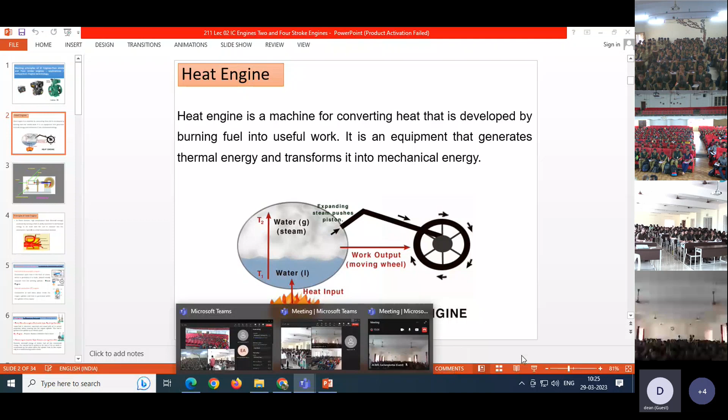For instance, if you are considering an engine, suppose for example if we are using two-wheeler, four-wheeler and tractors, those kinds of vehicles, the thermal power is converted into mechanical work.

So initially we are supplying the fuel inside the engine. The fuel is burned with the help of ignition. Then that will be converted into thermal energy. Again, the thermal energy is converted into mechanical work. So thereby we are doing different kinds of activities in agriculture.

A heat engine is a machine that converts chemical energy into thermal energy, and the thermal energy into mechanical energy. For doing this operation, there are different components involved in the engine, such as cylinder, piston, connecting rod, crankshaft, and camshaft. We will see each individual component later.

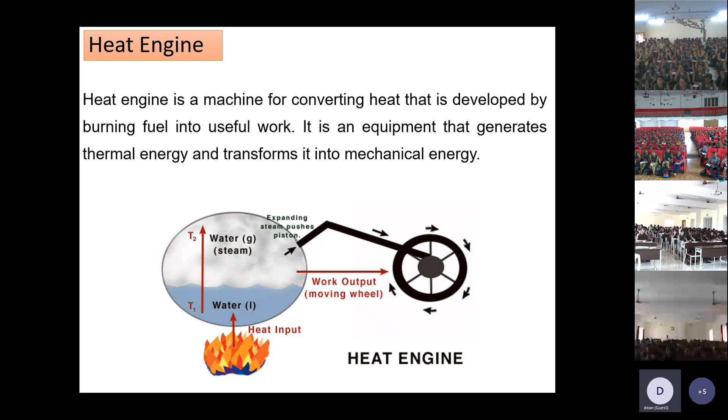So heat engine is a machine for converting heat developed by the burning of fuel into useful work. In this figure, there is burning gas below the component, so the water is converted into steam. The steam has more energy compared to water, so it pushes the piston towards the flywheel or crankshaft, and thereby we get mechanical work. So fuel energy is converted into chemical energy, chemical energy into thermal energy, and thermal energy into mechanical work. This is the basic principle of the heat engine.

This is an example of an external combustion engine, where the ignition and burning happens outside of the cylinder. Inside there will be steam or air. When the air or steam gets energy, it tries to expand. According to the gas law, when you burn some air or gas, it will expand, and this expansion pushes the piston, thereby giving us rotational movement. So the linear movement is converted into rotational movement, and thereby we achieve all kinds of activity.

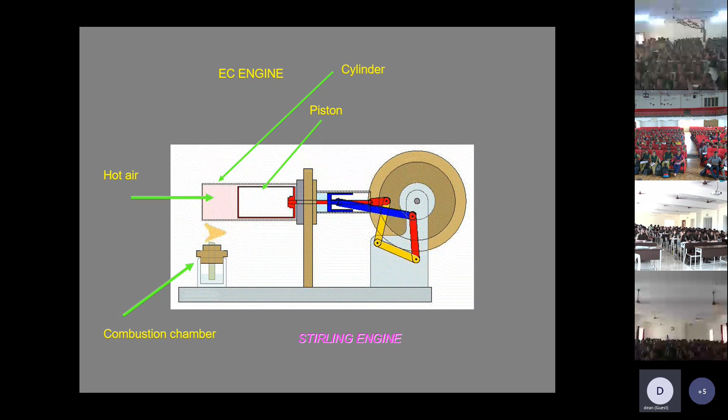The power moves towards the gearbox, then towards the differential, and finally reaches the drive wheel. The wheel makes the rotational effect, and thereby we pull some kind of load or transport goods somewhere. So thereby we are getting power.

Considering thermal energy, not all of it is converted into useful work. Some heat is lost due to friction, loss due to exhaust gas, some due to radiation, and some thermal energy moves away by conduction. So different components separate out from the main thermal energy.

In this device, the high temperature heat produced by the burning of fuel is partially converted to mechanical energy to do work, and the rest is rejected into the atmosphere in terms of smoke. Whenever the engine is working anywhere, we can witness some kind of smoke along with heat, so we are wasting some heat energy. There is no 100% conversion of heat energy into mechanical work.

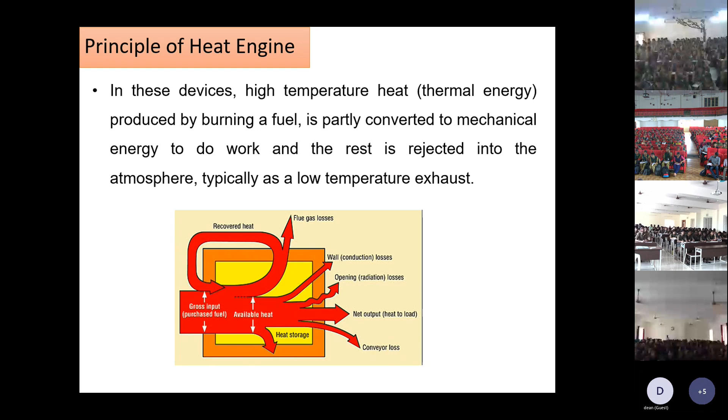Now let's look at different types of engines according to the operation, the usage of fuel, and the stroke, so that we can classify different kinds of engines. First, based on combustion of fuel, that is, where the fuel is burned, whether inside the cylinder or outside the cylinder. We can classify this as external combustion engine or internal combustion engine.

The best example of an external combustion engine is the steam engine. There we burn the gas outside of the cylinder, then the gas is expanded or converted into steam, and thereby we achieve mechanical work. The engine uses heat in the form of steam, which is generated in a boiler placed entirely separate from the working cylinder, and that is converted into mechanical work. The best example of the external combustion engine is the steam engine.

Next is the internal combustion engine, usually called IC engine. So IC engine is nothing but internal combustion engine, where the fuel is burned inside the cylinder. For example, as I already told, two-wheelers and four-wheelers — all kinds of these engines come under the internal combustion engine.

We already saw that fuel is filled in the tank, which moves into the cylinder, and that is converted into mechanical energy, giving power to our wheel. Then we move somewhere according to the usage of fuel inside the cylinder, accelerating our vehicle. So the internal combustion engine is one where fuel burns inside the cylinder — that's all. The combustion of fuel takes place inside the engine cylinder, and heat is generated within the cylinder of the engine. This is the example of the internal combustion engine.

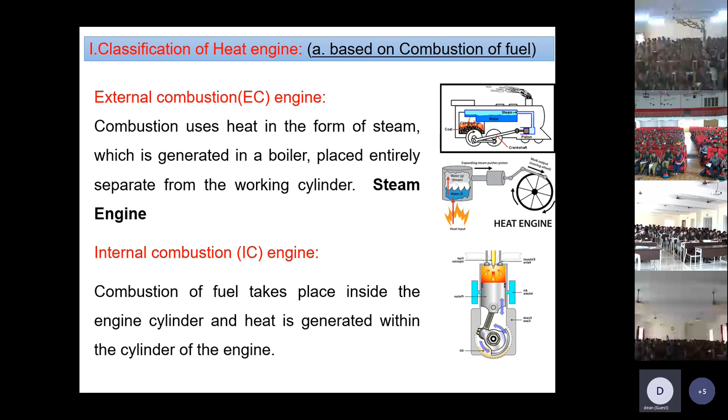Then according to the usage of fuel, we need energy from the fuel. As you know, fuel will be of different types: petrol, kerosene, diesel, even LPG, propane, butane, methane gases, which are also used as fuel for generating energy. If you consider petrol and gasoline engines, they come under spark ignition.

Later on I will tell why we are terming spark ignition engine. The petrol comes under one separate type of engine and a diesel engine comes under a different type. The petrol or gasoline engine comes under spark ignition engine. With the help of spark ignition, the ignition takes place and the pre-admitted mixture is inside the cylinder. So with the help of the ignition, the burning will happen. Again the same principle: we need to take thermal energy from the fuel, and that thermal energy is converted to mechanical energy.

So finally we are getting some mechanical work. Here liquid fuel is atomized. The petrol is in liquid form, and that should be atomized, meaning it should be vaporized. Then it should be mixed with the air. So the composition of the mixture of air and atomized petrol is not in liquid form, it will be in an atomized or vaporized form that is mixed with the air.

Both the mixture will enter into the cylinder with the help of the spark plug. The spark plug will produce the ignition. So with the help of the spark plug, the already present mixture of petrol and air will be ignited, and then burning will take place. So initially the mixture of petrol and air comes into the cylinder, and with the help of the spark plug, the ignition will be produced.

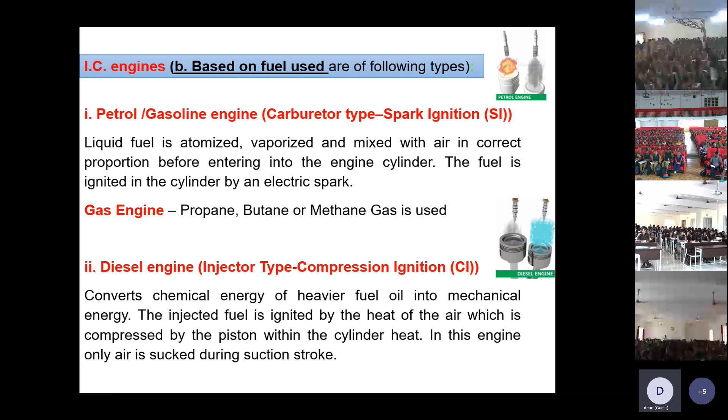I already told what is a spark ignition engine and what is a compression ignition engine. So here is the working principle of the spark ignition engine: a mixture of air and fuel, fuel meaning petrol. Suppose you are having a two-wheeler: initially the air and petrol are mixed with the help of a carburetor, and that is entered into the cylinder. Then with the help of the ignition spark plug, the ignition takes place, and the energy is converted into mechanical energy. So that is called the spark ignition engine or petrol engine.

The mixture of air and fuel is drawn into the engine cylinder, and the ignition is done by a spark plug. That's why we need a spark.

So if you are considering petrol engine, the important part is the spark plug. Every 100 hours or 200 hours, we need to clean the spark plug to provide proper ignition. The rapid explosion of air-fuel mixture within the cylinder, when ignited by the spark, is called constant volume combustion. This comes under the thermodynamics way of working principle.

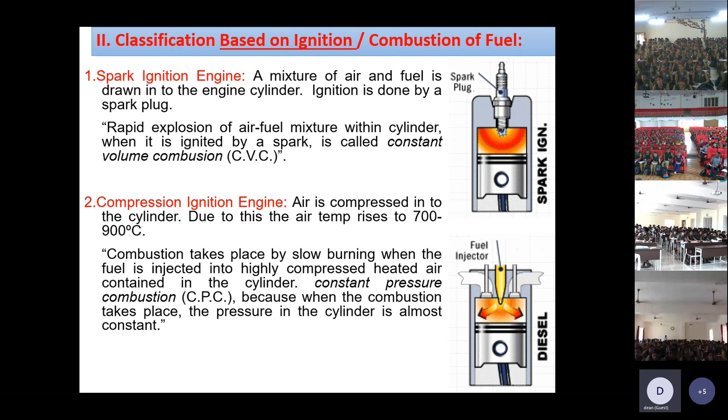Again, if you consider the compression ignition engine, air is compressed into the cylinder, and due to the compression, the air temperature rises to 700 to 900 degrees Celsius. Sorry for the interruption.

So actually petrol and diesel engines are very easy. If you consider the petrol engine, we have to say that it is a spark ignition engine. In the spark ignition engine, petrol and air mix and both enter into the cylinder, due to compression, and with the help of ignition, the fuel is burned. Then the expanded gas pushes the piston downward, thereby we get a rotational effect, which is then transmitted through the gearbox to the final wheel.

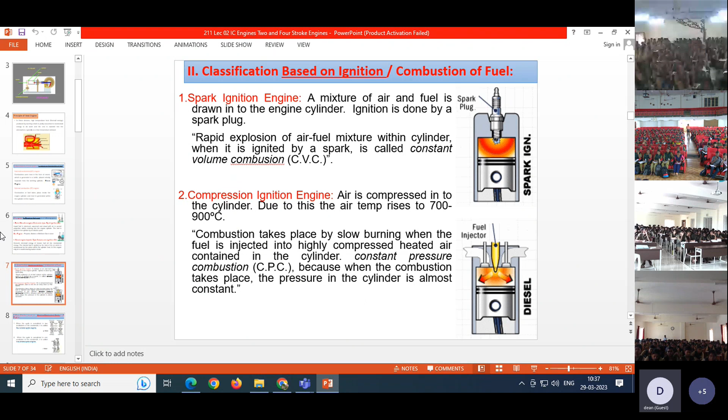But in the case of a diesel engine, initially air enters into the cylinder. Due to the high compression ratio, the pressure of air gets more heat content. Then at the end of the moment, we spray our diesel in a vaporized condition, and it burns. That's why we call the diesel engine a compression ignition engine, and the petrol engine a spark ignition engine. So there are only two differences: in a spark ignition engine, petrol and air enter the cylinder together initially, but in diesel, only air enters initially, and at the end of compression, we spray diesel into the cylinder with the help of an injector, which is like a nozzle.

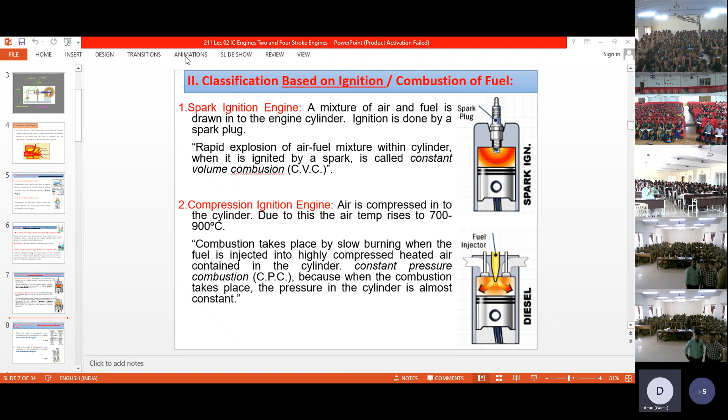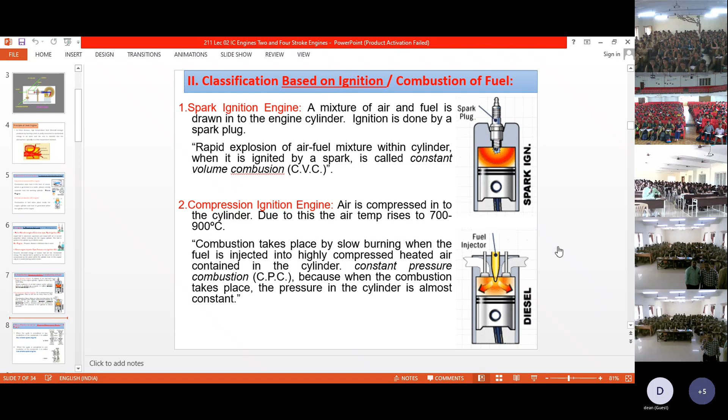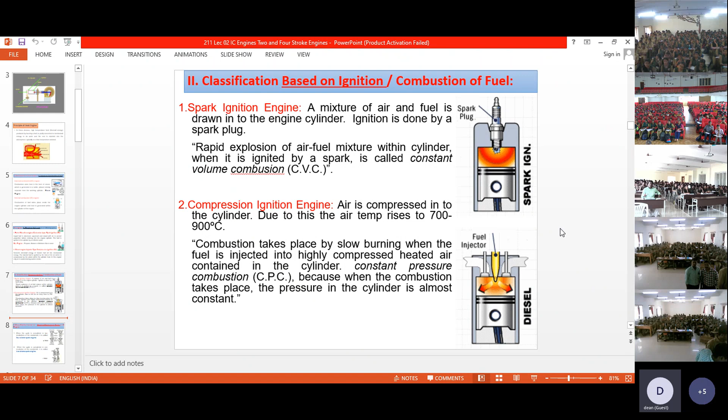Fuel combustion, that will be a spark ignition engine. Another one is a compression ignition engine. And according to the stroke, for making this thermal energy into mechanical energy, there will be different kinds of events occurring in the engine cylinder.

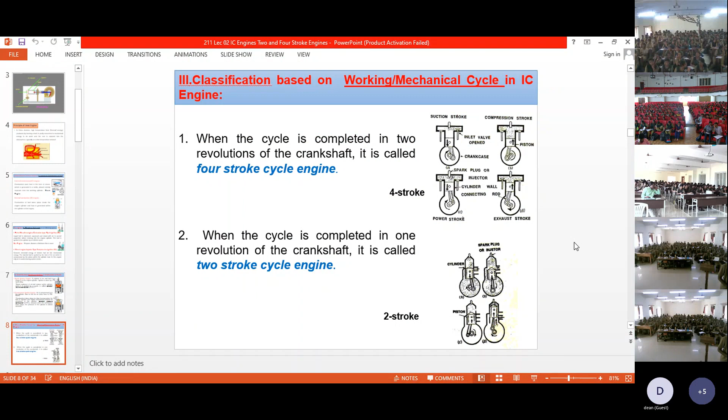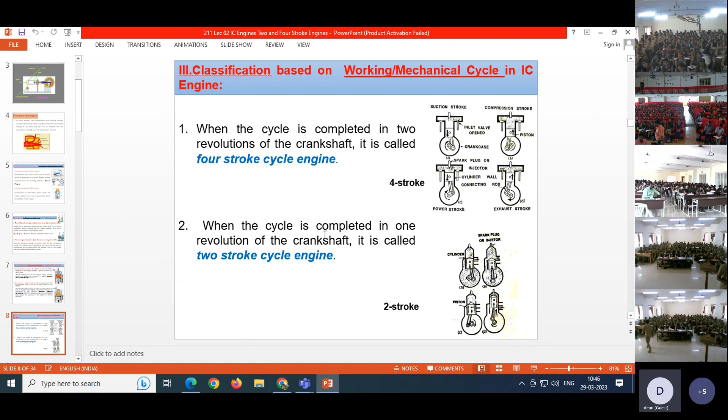So based on the stroke, there will be two types: one is the 4-stroke cycle engine, another is the 2-stroke cycle engine. The 4-stroke means nothing but the movement of the piston from top to bottom, that is called 1 stroke. If there are 4 strokes, the piston has to move 4 times: top to bottom, bottom to top, top to bottom, bottom to top. So in the 4-stroke, different kinds of events happen, thereby we get the output.

The cycle is completed in 2 revolutions of the crankshaft. I will explain how the crankshaft rotates based on the movement of the piston. When the stroke is 4-stroke, the crankshaft has to rotate 2 times, since 1 revolution is 360 degrees. Each 180 degrees, the piston moves from top to bottom, again bottom to top, so there's a 360 degree revolution covering 2 strokes. So obviously 4-stroke means 2 revolutions of the crankshaft is equivalent to 4 strokes.

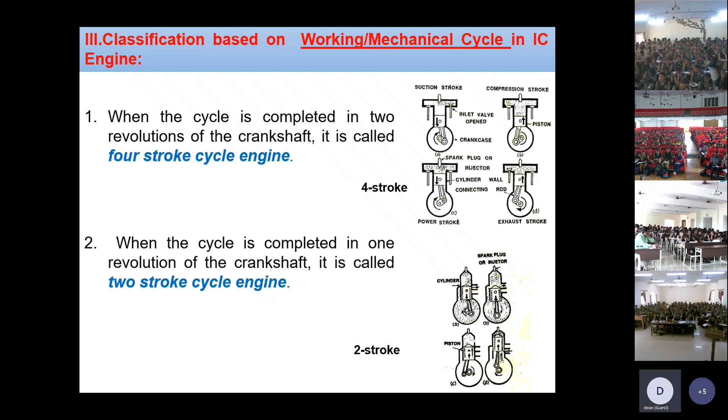But in the case of a 2-stroke engine, the 4 events occur within 2 strokes. So half of the crankshaft revolution completes 2 kinds of events: it may be suction, compression, power, then finally exhaust.

So the working principle of the internal combustion engine: as I told already, we need fuel inside the engine and we need ignition, thereby we burn our gas, which is converted into mechanical work. So these are all the essential components needed to run an engine.

So the mixture of fuel with the correct amount of air is exploded or burned in an engine cylinder which is closed at one end. The heat is released and causes the pressure of the burning gas to increase. These are all the steps involved in converting fuel into thermal energy, and the force acts on the closely fitting piston to move it down the cylinder.

The power is transmitted to the crankshaft by the connecting rod, and the crankshaft turns the flywheel. So this is how power moves from fuel to piston to connecting rod to crankshaft to flywheel. Then it goes to the gearbox, and finally it reaches the wheel.

So these are the steps involved when power generated from the fuel is moving towards the wheel. For continuous rotation of the crankshaft, the explosion is repeated at different time intervals. Before this can happen, the used gas has to be expelled. Whenever you feed a mixture of air and fuel, it should be burned, then the burned gas has to be removed from the cylinder. This is called removing smoke from the engine, or we can call it scavenging.

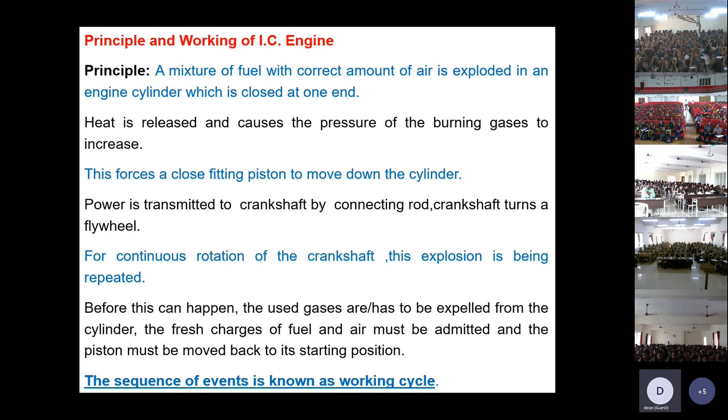In one working cycle, the fuel has to enter the cylinder, it has to be compressed, then burned, the burned gas has to expand, and the expanding gas transmits energy from fuel to cylinder. The transmitted movement is converted into rotary movement that reaches the wheel. These are all the events taking place during the working cycle of the engine.

If you consider a 4-stroke engine, from an exam point of view we are going to consider only two kinds of engines: one is a 4-stroke engine, the other is a 2-stroke engine. In both cases, the events happen at a predetermined time.

Almost all tractors currently use what is called the 4-stroke combustion cycle to convert diesel into motion. The 4-stroke approach is also known as the Otto cycle, invented by Nikolaus Otto. That's why we call it a diesel engine, or it is called the Otto cycle.

There are four kinds of strokes: one is suction stroke, another is compression stroke, third is power stroke, fourth is exhaust stroke. These are the strokes present in every 4-stroke engine as well as 2-stroke engine.

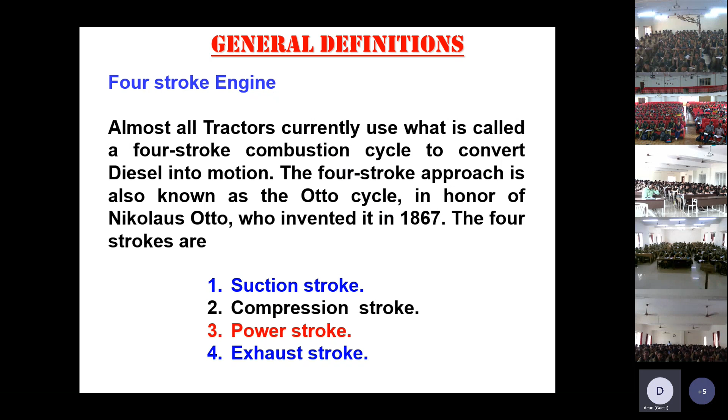Suction stroke is nothing but admitting the fuel mixture of air inside the cylinder, that is called suction. The suction stroke happens due to the movement of the piston from top to bottom, thereby creating low atmospheric pressure.

For example, if you have a syringe, when you draw the plunger from top to bottom, the liquid gets admitted inside the syringe. The same principle is involved in the cylinder. When the piston moves downward from top to bottom, it creates less atmospheric pressure, or negative atmospheric pressure. Due to this pressure difference, the fuel in the tank moves towards the cylinder.

Once air enters the cylinder, in case of a petrol engine we need to spray the petrol, so both air and petrol mixture enter during the suction stroke. But in case of a diesel engine, only air enters into the cylinder. During the end of compression, the diesel has to be sprayed. So the suction stroke is nothing but the entering of fuel inside the cylinder.

Again, considering suction, compression, power, and exhaust strokes, we need to consider the position of the valve. The valve is like a door. When you are sitting inside the classroom, you act as the fuel, entering the classroom through the door. The same way, the valve acts as a door—it opens at a particular time, and only then can the fuel enter from outside to inside.

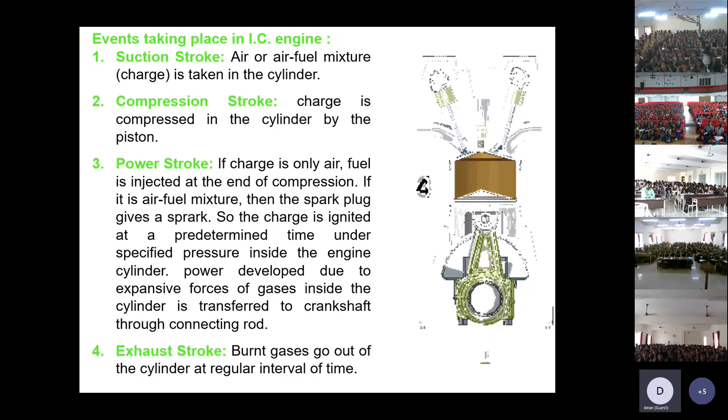Due to the burning, the power stroke will happen. At that time also, both valves have to be in closed condition. Then finally there is an exhaust stroke. At that time, the exhaust valve has to be open, and the inlet remains closed.

So again, considering a different kind of stroke: suction, where air or air-fuel mixture is taken into the cylinder. In the compression stroke, the charge is a mixture of air and fuel, or in case of a diesel engine, air only. The charge is compressed in the cylinder by the piston. Then in the power stroke, if the charge is only air, fuel is injected at the end of compression. This is the example of a diesel engine, since the diesel engine only sprays at the end of compression.

Initially the air goes inside the cylinder and that gets compressed. During the end of compression, we spray diesel with the presence of heat available in the compressed air, and that is converted into mechanical work.

So if it is an air-fuel mixture, then the spark plug is needed. You have to be very clear: if considering a diesel engine, an injector is essential to spray fuel. If it is a spark ignition engine, a spark plug is essential to give the spark, which is an electrical spark. The spark plug ignites the charge at a predetermined time and specific pressure inside the engine cylinder.

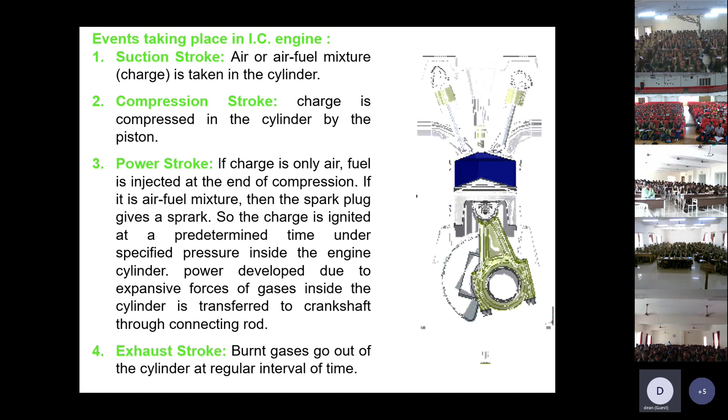The power is developed due to the expansive forces of the gases inside the cylinder, which is transferred to the connecting rod and the crankshaft.

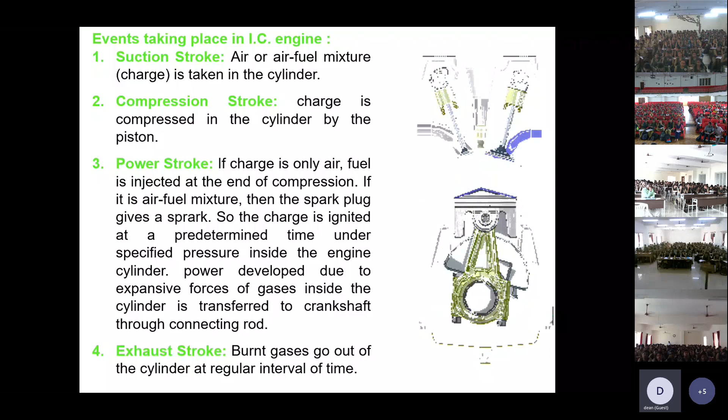So you can see the animation of this figure. One side valve allows the mixture of air and petrol to move inside the cylinder during suction. During compression, the piston has to move from bottom to top, then only compression takes place.

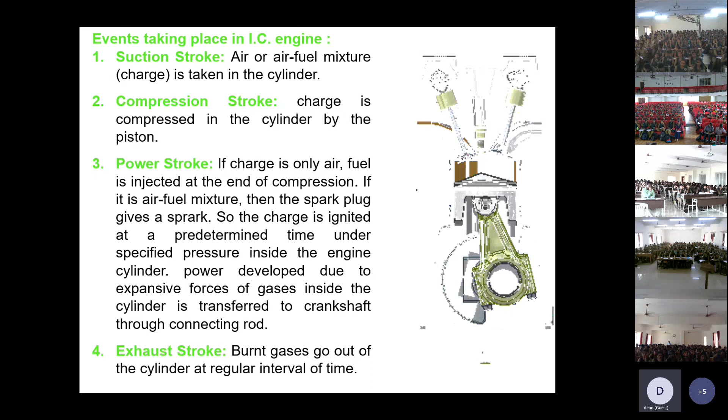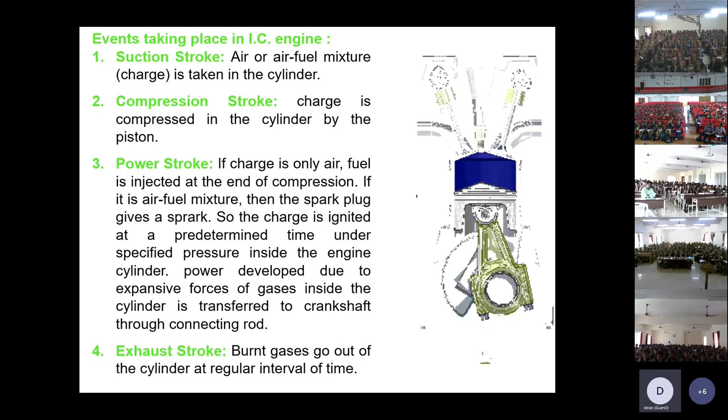During compression, both valves have to be in closed condition. Due to the compression, heat rises inside the charge. At the end of compression, we need to spray our diesel, then explosion takes place, and we get the energy. Finally, in the exhaust stroke, the burned gas has to be removed from the cylinder, then we can give the fresh mixture for the next event.

So in a 4-stroke engine, all events are completed in four strokes of the piston. The valve controls the inlet of charge and outlet of charge. So the main component controlling inlet and exhaust is called the valve. According to the valve position, we know whether it is a suction stroke, compression stroke, power stroke, or exhaust stroke, based on the position of the valve.

The first stroke is the movement of the piston from top to bottom. When the piston moves from top to bottom, the crankshaft rotates 180 degrees. So the piston moves downward from top to bottom, and the crankshaft rotates half of a revolution, covering 180 degrees. So in the 4-stroke cycle engine, each piston downward movement covers 180 degrees or half a revolution. The next stroke is compression.

Both valves have to be in closed condition. The entrapped fuel mixture will be compressed again by the piston. At that time, the crankshaft again rotates the next 180 degrees, covering another half revolution. So half revolution plus half revolution, that is 180 degrees plus 180 degrees, totaling 360 degrees, one full revolution.

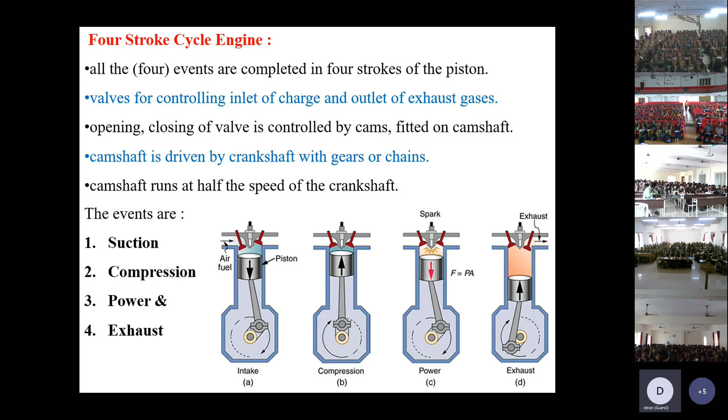The topmost position of the piston is called top dead center. The bottommost position reached by the piston is called bottom dead center. TDC and BDC are terminologies involved with the piston. So these are the 4 steps involved in the 4-stroke engine. The same thing will be shown in each cycle.

This is the suction stroke. You can see in the suction stroke the inlet valve is in open condition, so air is entering. At top dead center, the piston reaches TDC and then moves downward, reaching bottom dead center. Due to the lower atmospheric pressure, the air is entering into the cylinder.

The piston movement, we can say, is from top to bottom dead center. What is the position of the valve? The inlet will be open. What is the position of the other valve? The exhaust will be in closed condition. Then what is the action? Air will be entering, or the air-fuel mixture will be entering, suppose in case it is a petrol engine.

One thing you have to understand: the four-stroke cycle engine can be adapted in both cases, petrol engine as well as diesel engine. So it may be pure air entering, or sometimes in case of a petrol engine, the air-fuel mixture can enter. So this is a suction stroke. Can you identify from the figures whether it is a petrol or diesel engine?

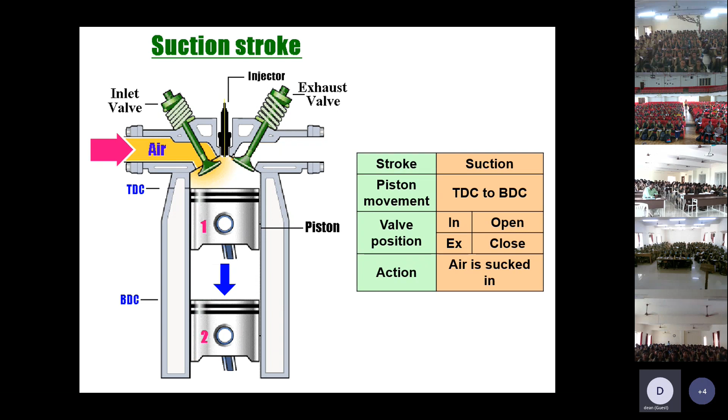The inlet valve allows the movement of fresh mixture inside the cylinder, while the exhaust valve allows the burned gas to move away from the cylinder after combustion. Then again we need to feed the fresh air.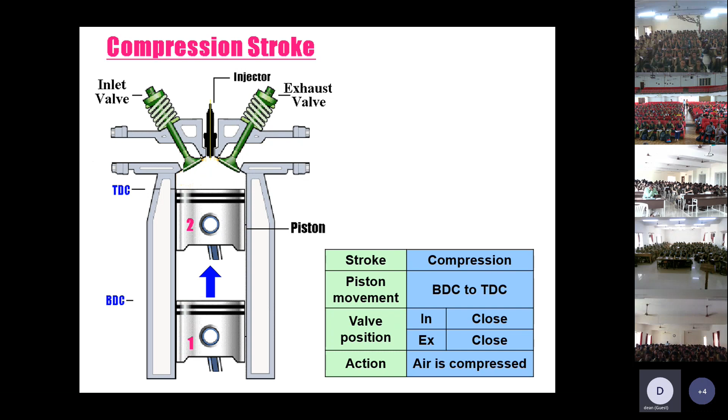Without compression we can't increase the temperature inside the gas, so air is compressed. Next is the power stroke. What is the position of the valve, open or closed? Both the inlet and exhaust valve will be closed. What is the position of the piston initially? Top dead center, as it is a continuation of the previous compression stroke.

Now the piston tries to move downward due to ignition. The injector sprays the diesel in atomized form, as small droplets, which then mix with the air. The air already has high heat, so once the fuel touches the air, it burns.

The burned gas pushes the piston from top to bottom, so this stroke is called the power stroke. The piston moves from top dead center to bottom dead center, both valves remain closed, and diesel is injected at the end of compression causing an explosion. Now we are getting power, only from this particular stroke.

There are 4 strokes: suction, compression, power, and exhaust. Only the power stroke gives us power; the remaining 3 strokes draw their power from the power stroke. I will explain how this power is stored in the system.

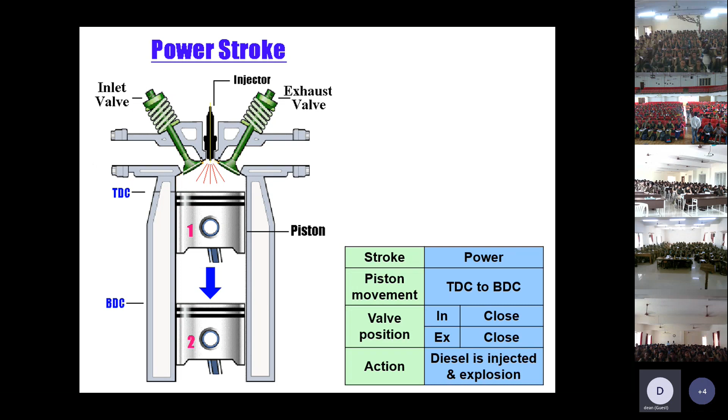Now the final stroke is the exhaust stroke. What is the position of the valve? The inlet valve is closed. The piston moves from bottom to top, pushing all the burned gas, and due to the opening of the exhaust valve, it moves towards the exhaust ports.

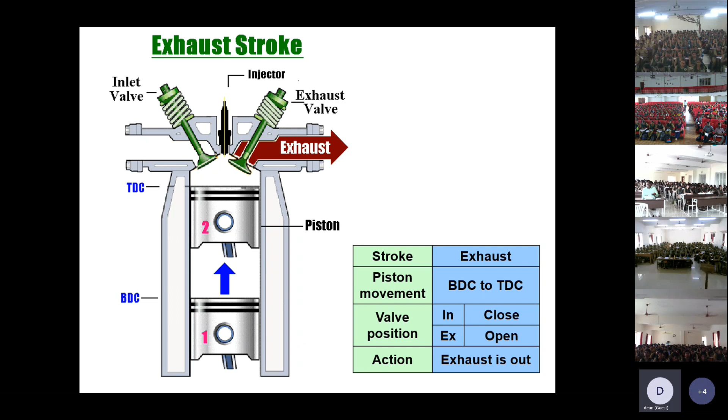So the stroke is exhaust, with piston movement from bottom dead center to top dead center. The exhaust valve is open while the inlet valve remains closed. This particular event is called the exhaust stroke.

Similarly, in a two-stroke engine, the entire 4-stroke cycle happens within one single revolution. The two-stroke means the movement of piston from top to bottom is one stroke, and from bottom to top is the next stroke.

Each stroke involves two actions happening. First, 4 events must occur for the cycle to complete and for us to get power: suction, compression, power, and exhaust. Without these events, the cycle will not complete and we will not get power, so for any kind of engine these 4 events must occur.

These 4 events can be performed by both the 4-stroke engine and 2-stroke engine. In a 2-stroke engine, one revolution occurs: half a revolution is one stroke, the other half is the second stroke, completing the 4 events. So in such an engine, the whole sequence of suction, compression, power, and exhaust is completed in 2 strokes of the piston and 1 complete revolution of the crankshaft, which is the bottom portion of our shaft.

So there will be a shaft at the bottom of your piston. The piston moves downwards, via connecting rod, then the connecting rod is attached to the crankshaft that will rotate in a circular motion.

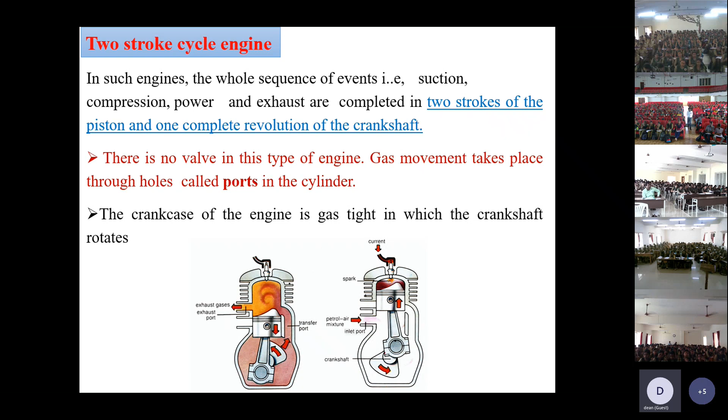So if you see here, when the piston is moving upward, there will be negative pressure created at the bottom of the crankcase. Once vacuum is created, automatically the air-fuel mixture enters into the crankcase. During that time, what is the piston doing? It is trying to pressurize the compressed fuel at the top portion of the piston. That's why we say suction and compression happen simultaneously in a single stroke. So the next stroke, power and exhaust happen as a single stroke. So within 2 strokes, we are completing 4 events: suction, compression, power and exhaust.

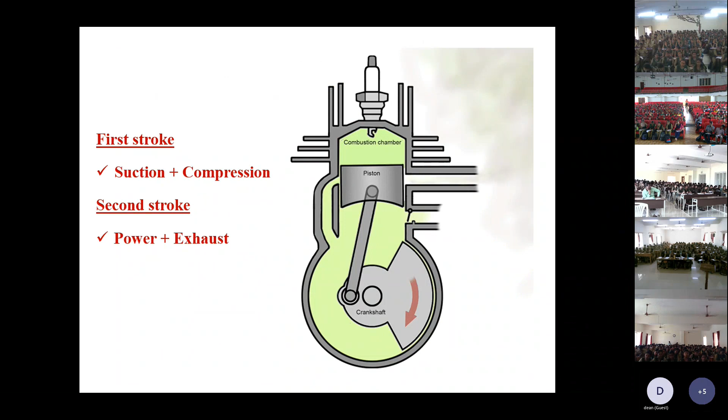So you have to remember, the first stroke will be suction and compression, and the other stroke will be power and exhaust. Both things happen simultaneously due to a single revolution of the crankshaft.

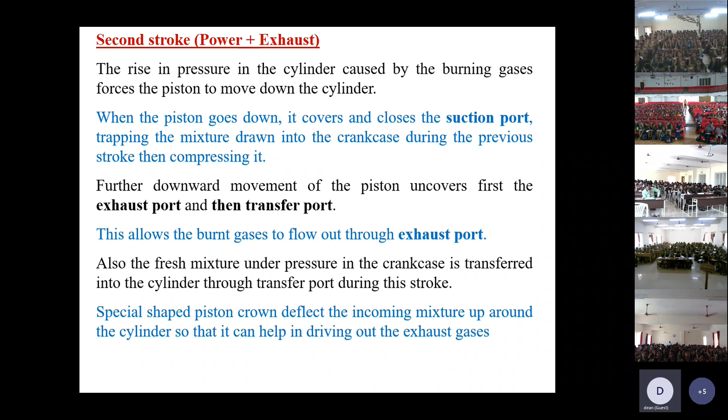So next we will move into components of engines. As I already told, there are two things operating the movement of charges inside the cylinder—that is called the valve. Suppose it is a petrol engine, what do we need? The top portion has to be connected with the spark plug. Suppose it is a diesel engine, we need a fuel injector. And the next thing is the piston.

The piston is surrounded by the cylinder. Inside the cylinder only, all the events take place. The piston moves downward due to the explosion of gas during the power stroke. When the fuel is burned, that tries to push the piston downward. So the piston moving downward is connected to the connecting rod, and we need some connection to the crankshaft. This rotation takes place at the bottom of the engine—that is called the crankshaft. Crank means rotating, so automatically it will rotate the shaft, that's why we call it the crankshaft.

So the crankshaft is connected to the piston with the help of what kind of shaft, what kind of rod? The connecting rod. So there is a cylinder, inside the cylinder there is a piston. The piston moves downward with the help of the explosion gas. The power is transmitted via the connecting rod, and the connecting rod is connected to the crankshaft. So these are all the components with respect to the engine.

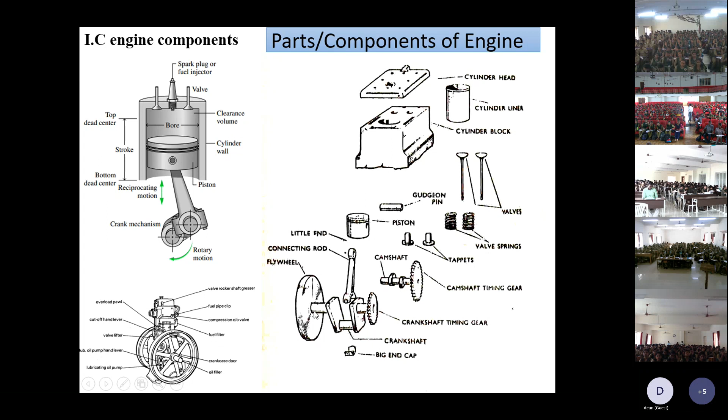So initially, the suction will happen. How does it happen? The piston has to move from top to bottom. Where does the power come from? The flywheel. During the power stroke, the entire source of power is stored in the flywheel, and the remaining 3 strokes are delivered by the flywheel. The flywheel is connected with the crankshaft - at the end of the crankshaft there is a flywheel. If it is a single cylinder diesel engine, you see this big wheel rotating with the crankshaft. These are the components and parts of the internal combustion engine.

Now, terminology related to the engine. If you want terminology with respect to the cylinder, what do you mean by bore? It is nothing but the diameter of the cylinder.

Usually when buying a 2-wheeler or 4-wheeler, it is expressed in terms of cc. What is the cc of your bike? What is the cc of your car? For example, we have a 150 cc bike, or 120 cc. The cc is related to this bore and stroke. Bore is the diameter of the cylinder - if you measure with the help of a scale, what is the diameter of the cylinder? That is called bore. So bore is nothing but the diameter of the cylinder or piston.

So what is the unit of diameter? It may be centimeter, it may be meter - it is a distance. The diameter is nothing but the length of our cylinder. We want to measure the size of the cylinder, and then we can say what is the capacity of the cylinder, whether it's 150 cc or 120 cc. So this is bore, the diameter of the engine cylinder.

What is the stroke? We already discussed it. What do you mean by stroke? It is the movement of the piston from top to bottom - the distance it covers from top to bottom. That is called stroke: the linear distance traveled by the piston from top dead center to bottom dead center. Once the piston moves from top and reaches bottom, that is called a stroke.

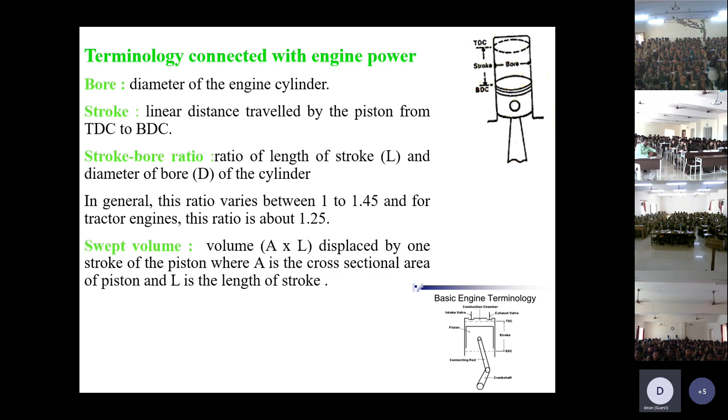So to find the entire volume, we need to measure clearance volume as well as swept volume. Swept volume is the length of the stroke multiplied by the area, giving the swept volume. Adding clearance volume gives the total cylinder volume. This is top dead center, this is the piston, and there will be a clearance - that particular volume is the clearance volume.

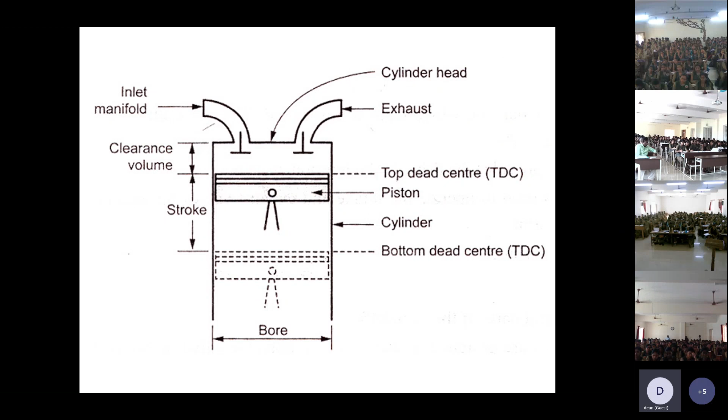So what is compression ratio? During the compression stroke, the air-fuel mixture or air is compressed by the piston, and this can be termed as a ratio. If 14 units of fuel enter the cylinder, it will be compressed into 1 part. Suppose 14 meters length of air enters the cylinder, that will be compressed into 1 meter length - that much volume reduction happens. That is called compression ratio.

What is the compression ratio of a diesel engine? 14:1 to 22:1. In the petrol engine, the compression ratio will be 4:1 to 8:1, much lesser than the diesel engine. That's why the diesel engine doesn't require a spark plug - that much compression generates enough heat inside the gas, so you spray the fuel and explosion takes place. When comparing, compression ratio is high in diesel engines, whereas petrol engines have less.

What is the reason we need to create this much compression? The ultimate goal is to create temperature or heat inside the cylinder, then only explosion takes place. That's why the diesel engine has more compression ratio compared to petrol engine - since the petrol engine has a spark plug, there's no need for that much compression. That's why diesel engines have more weight compared to petrol engines. Diesel engine vehicles are more robust, larger, and heavier than petrol engine vehicles - that's why cars prefer petrol engines, which give more speed compared to power ratio.

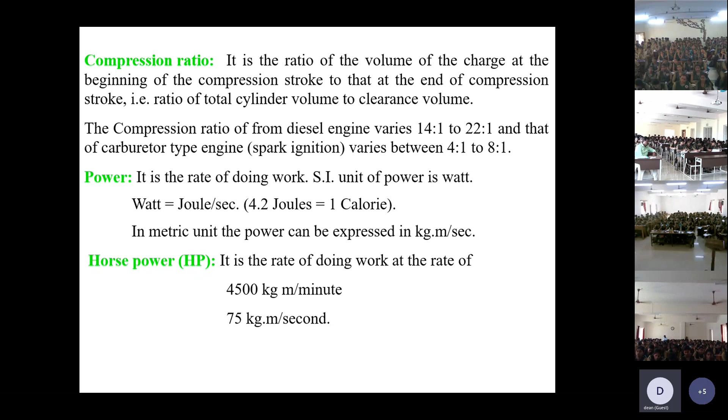A horse can lift 75 kg of mass to a height of 1 meter within 1 second. That is called 1 HP, or 75 kg meter per second. If you convert kg into Newton, you get 746 watts. So 1 horsepower is 75 kg meter per second, or 4500 kg meter per minute. This is the unit conversion.

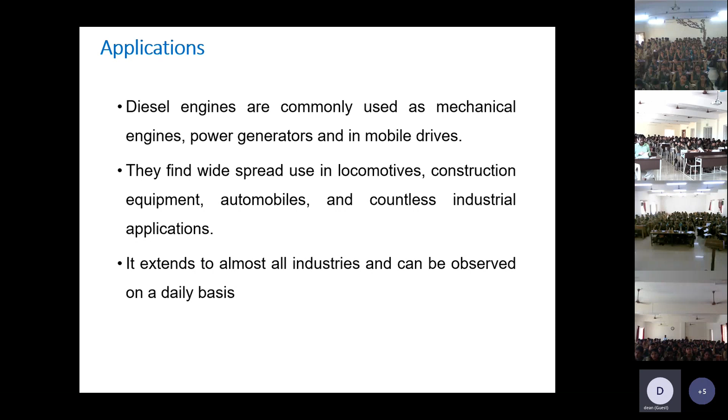The applications you already know, it is used in all kinds of activities, not only agricultural aspects, but also construction equipment, automobile, and civil engineering. These are all differences you already know.

So what is the difference between 4-stroke and 2-stroke? Based on crankshaft rotation, tell me. In the 4-stroke, the crankshaft will rotate two revolutions. But in the case of 2-stroke, this is the major difference between the 4-stroke and the 2-stroke.

Also, what power is generated? In case of 1 power stroke for every 2 revolutions of crankshaft, this is a known fact. Since it is 4-stroke, there will be 1 power stroke, so it has to rotate 2 times. But in case of a 2-stroke engine, 1 power stroke happens each revolution of crankshaft. So for each revolution of crankshaft, we get 1 power stroke in the 2-stroke engine, but in the 4-stroke engine it has to rotate 2 times, then only we get 1 power stroke.

There are inlet and exhaust valves in the engine, and inlet and exhaust ports inside. So here is one more difference between 2-stroke and 4-stroke. In the 4-stroke, which device allows the fuel? The valve - inlet valve, exhaust valve. Whereas in the case of a 2-stroke engine, it's a port, or simply a hole. So there is no valve presence in the 2-stroke engine.

The crankcase is not fully closed and airtight in a 4-stroke engine. But in the 2-stroke engine, the crankcase - that is the bottom of the engine - since the fuel enters at the bottom of the cylinder, it must be airtight, it should not leak from outside. So in case of a 2-stroke engine, it's airtight, whereas in a 4-stroke engine it may not be airtight.

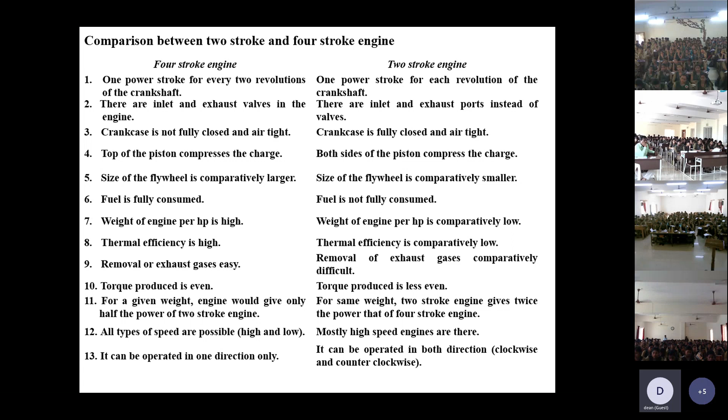So the thermal efficiency of a two-stroke engine is less compared to a four-stroke engine. The removal of exhaust gas is easy in the four-stroke, but in the two-stroke it's very tedious, since partial air mixes with fresh gas while the remaining goes outside. So the torque produced is even in the four-stroke, whereas in the two-stroke the torque produced is less even. These are the comparisons between four-stroke and two-stroke.

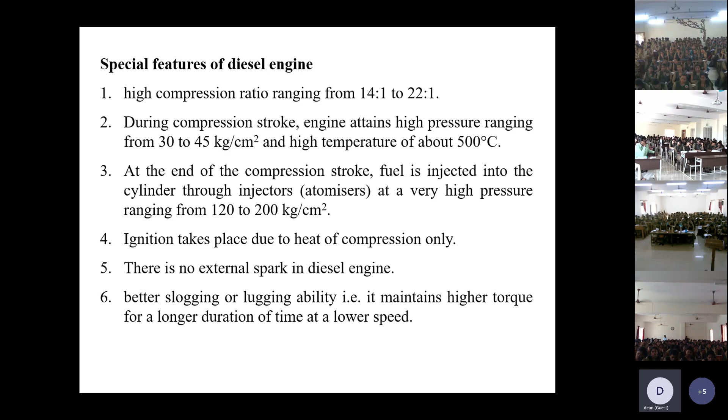This is a special case - we already discussed the compression ratio of a diesel engine, the compression ratio of a petrol engine, and how much pressure is built during compression. About 30 to 45 kg of pressure is created. The same way we can compare diesel and petrol - what is the major difference between diesel and petrol engines?

Spark must be required for petrol engine. Injector must be required. So what is the compression ratio of petrol and diesel?

Compression ratio for diesel is 14:1 to 22:1, whereas in a petrol engine it is 5:1 to 8:1. Here diesel is the fuel, where petrol is the fuel.

In a diesel engine, air alone enters into the cylinder, whereas in a petrol engine, both air and fuel are mixed with the help of a carburetor. This device is called a carburetor, and it mixes the air and petrol.

So here the fuel injection pump is required, whereas for petrol, a carburetor and ignition are required. The thermal efficiency for the diesel engine is around 32 to 38%, whereas thermal efficiency of petrol engine is around 25 to 32%.

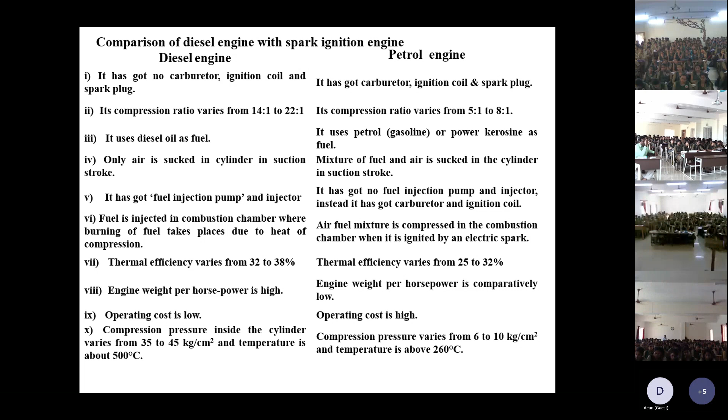Thermal efficiency, as I already told, means the entire fuel will not be burned, the entire heat will not be converted into mechanical work. Only a partial amount of heat is converted into mechanical work. So for the diesel engine, 32% of your fuel will be converted into mechanical work. These are the comparisons between diesel and petrol engines.

So this is the entire lecture about the working principle of four-stroke and two-stroke engines, terminology related to the engine, and the differences between two-stroke, four-stroke, as well as petrol engine and diesel engine.

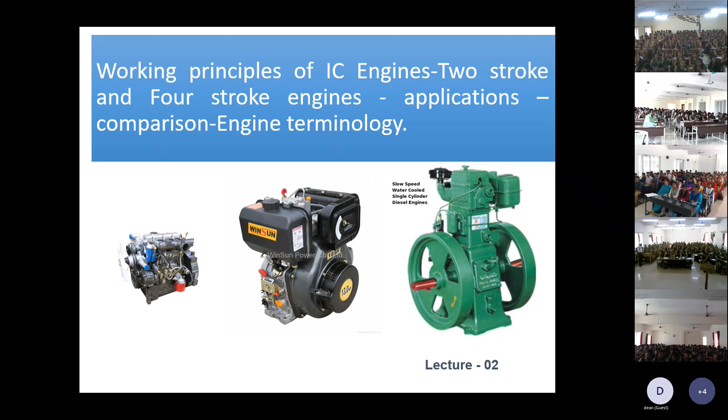Sir Ramji, any doubt from your side, from the student side? Kamaraj sir, Joshua sir. Sir Ramji, is it audible? Are you getting my voice, sir? Any doubt? Audible, Mohan, audible, audible. Sir, if you have any doubts, please ask students.

How much temperature when power is generated, sir? How much power is generated? The temperature will be around 2000 to 3000 degrees raised during the power stroke. Okay sir, thank you sir.